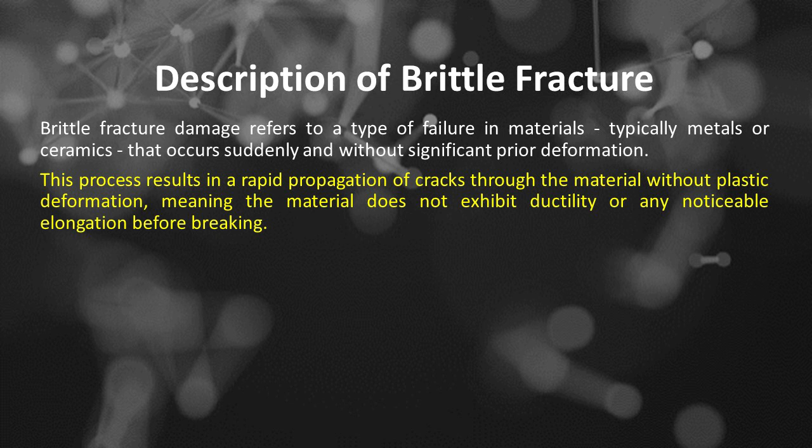Brittle fracture is the sudden rapid fracture under stress, residual or applied, where the material exhibits little or no evidence of ductility or plastic deformation. Brittle fracture damage refers to a type of failure in materials, typically metals or ceramics, that occurs suddenly and without significant prior deformation. This process results in a rapid propagation of cracks through the material without plastic deformation, meaning the material does not exhibit ductility or any noticeable elongation before breaking.

Characteristics of brittle fracture include the following. Number 1 is rapid or sudden failure. Brittle fractures often occur without warning, leading to catastrophic failure, as the material can withstand loads up to a critical point and then fail almost instantaneously.

Number 2 is crack propagation. The fracture typically progresses along specific planes called cleavage planes, often following the material's microstructural features. Crack propagation is generally fast, leading to sharp, clean fracture surfaces.

Number 3 is appearance of fracture surface. The surfaces created by brittle fractures usually show a glossy or granular texture, with no evidence of deformation such as stretching or bending. The presence of cleavage facets, where the fracture has split along crystallographic planes, is common, particularly in metallic materials.

Number 4 is factors influencing brittle fracture. Several factors can contribute to brittle fracture, including material composition, temperature, strain rate, and stress concentration from notches or other geometric discontinuities. Lower temperatures and higher strain rates generally promote brittle behavior in materials that may otherwise exhibit ductility.

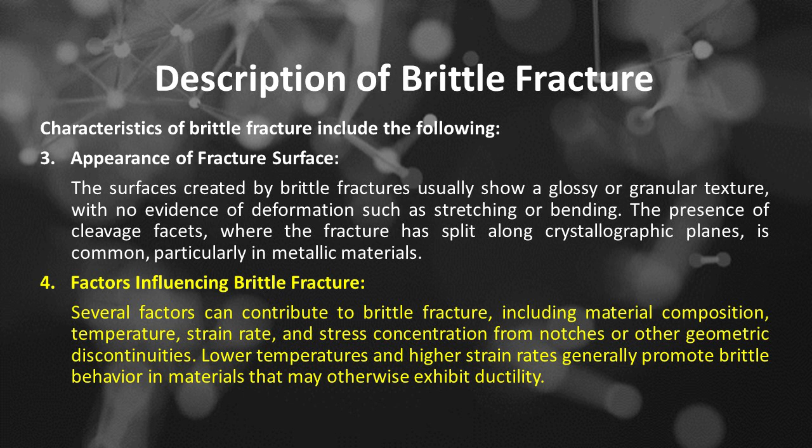Number 5 is applications and implications. Understanding brittle fracture is essential in various industrial applications, as it can lead to premature failure in structural components, pipelines, and machinery. Engineers often design to minimize the risk of brittle fracture by using materials with good toughness, avoiding stress concentrators, and ensuring appropriate operating conditions.

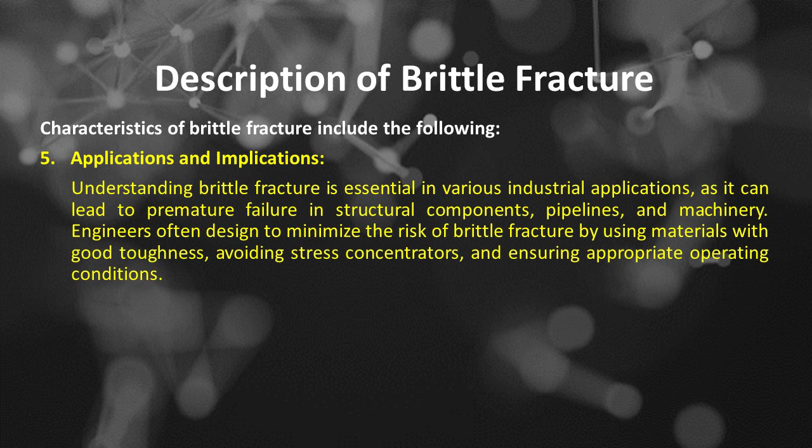Number 6 is fracture toughness and mechanics. The first is fracture toughness, or low toughness. The ability of a material to resist brittle fracture is quantified by its fracture toughness, which is a critical property in the selection of materials for applications where failure could have severe consequences. Materials that are susceptible to brittle fracture usually have low toughness, which means they cannot absorb much energy before failing.

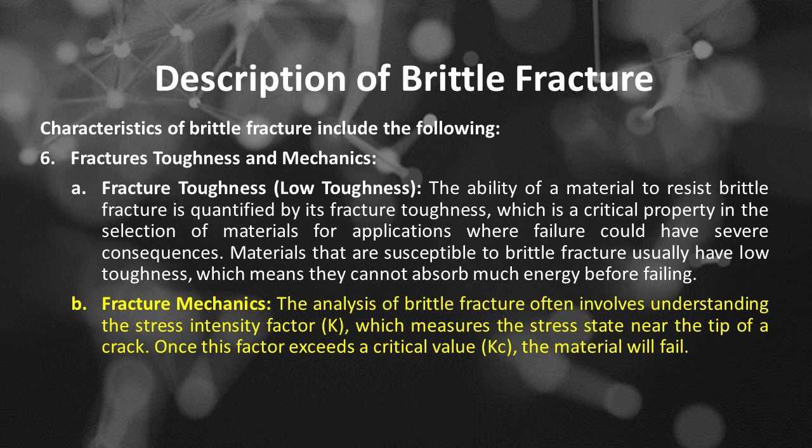The second is fracture mechanics. The analysis of brittle fracture often involves understanding the stress intensity factor, or K, which measures the stress state near the tip of a crack. Once this factor exceeds a critical value, or Kc, the material will fail.

In conclusion, brittle fracture damage represents a significant failure mode that engineers and materials scientists must consider, particularly in the design and maintenance of structures that require high reliability and safety. Brittle fracture damage is a critical failure mode in materials that can lead to unexpected and catastrophic structural failures, necessitating careful consideration in engineering and material selection.

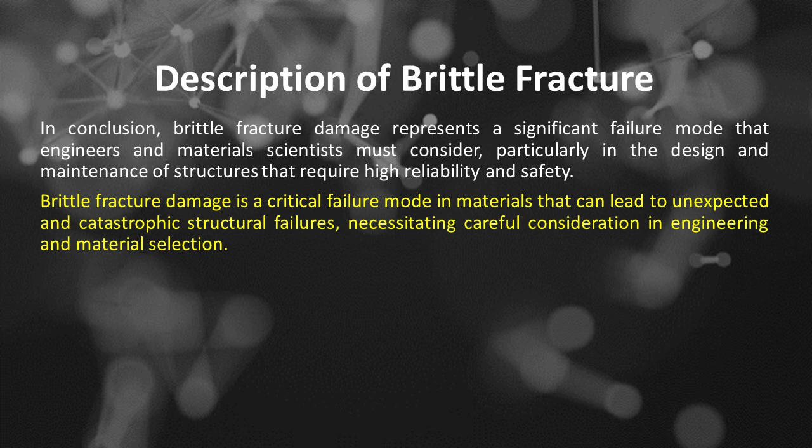Affected materials of brittle fracture damage based on API 571. Carbon steels and low-alloy steels are of prime concern, particularly older steels. 400 series SS are also susceptible. Brittle fracture is a failure mechanism that occurs in materials when they are subjected to stress and do not exhibit significant plastic deformation before breaking.

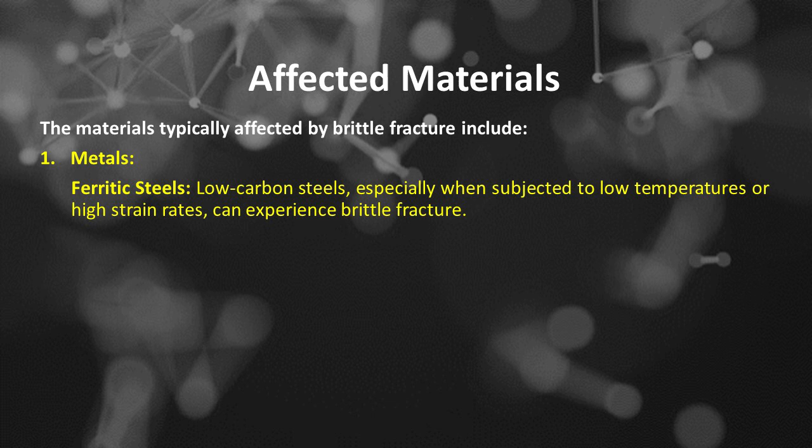The materials typically affected by brittle fracture include: Number 1 is metals, such as the following. Ferritic steels, low-carbon steels, especially when subjected to low temperatures or high strain rates, can experience brittle fracture. And high-strength steels, these materials can be susceptible to brittle fracture, particularly in welds or heat-affected zones. And then cast irons, particularly gray cast iron and white cast iron, can experience brittle fracture, especially under stress concentrations.

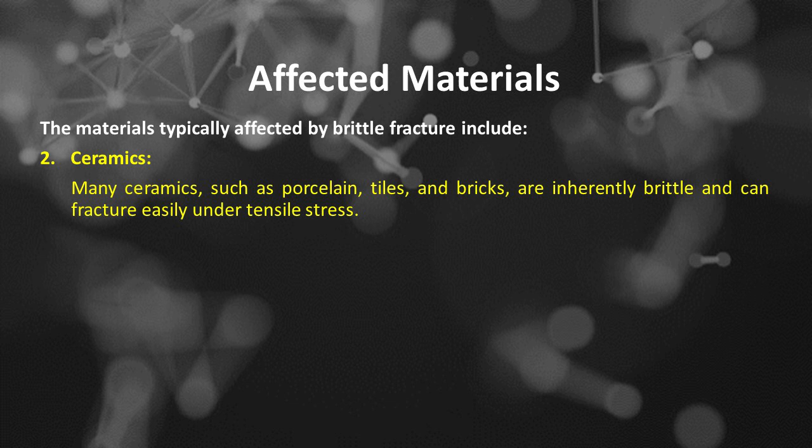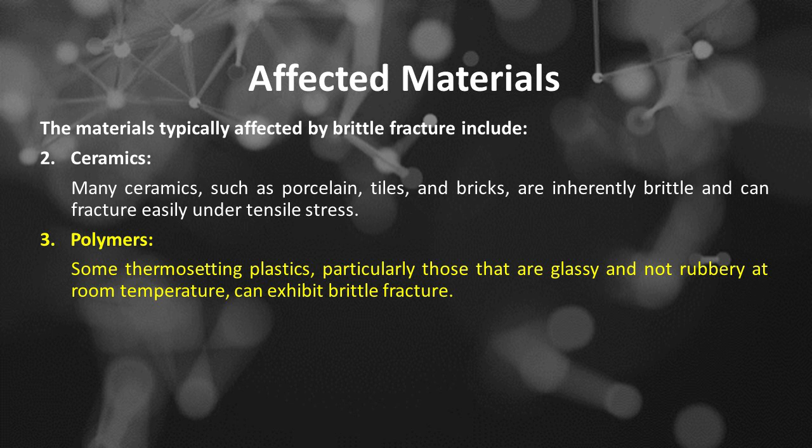Number 2 is ceramics. Many ceramics, such as porcelain, tiles, and bricks, are inherently brittle and can fracture easily under tensile stress. Number 3 is polymers. Some thermosetting plastics, particularly those that are glassy and not rubbery at room temperature, can exhibit brittle fracture. Number 4 is composites.

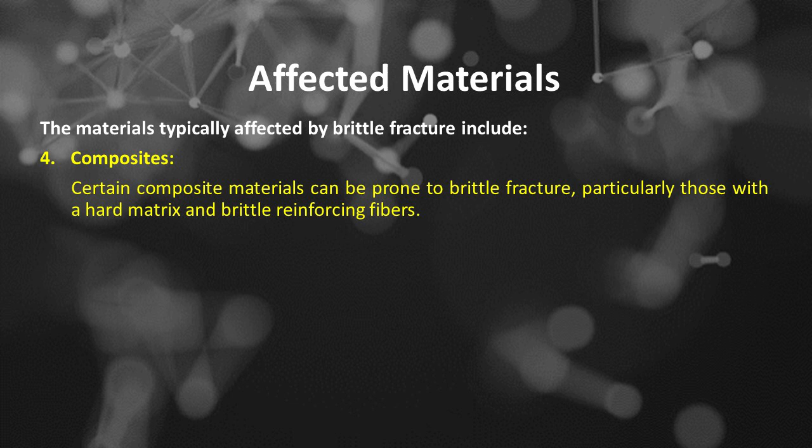Certain composite materials can be prone to brittle fracture, particularly those with a hard matrix and brittle reinforcing fibers. Number 5 is glasses. Glasses are also considered brittle materials and can fracture without noticeable plastic deformation. Factors such as temperature, loading rate, and the presence of stress concentrators, like notches or cracks, can influence the susceptibility of these materials to brittle fracture.

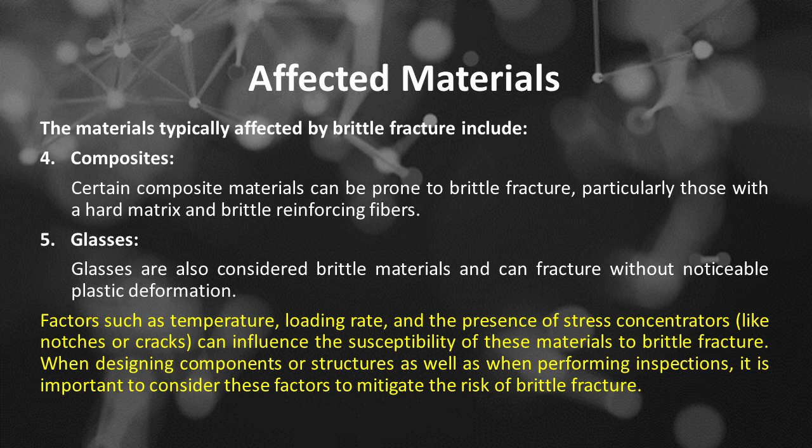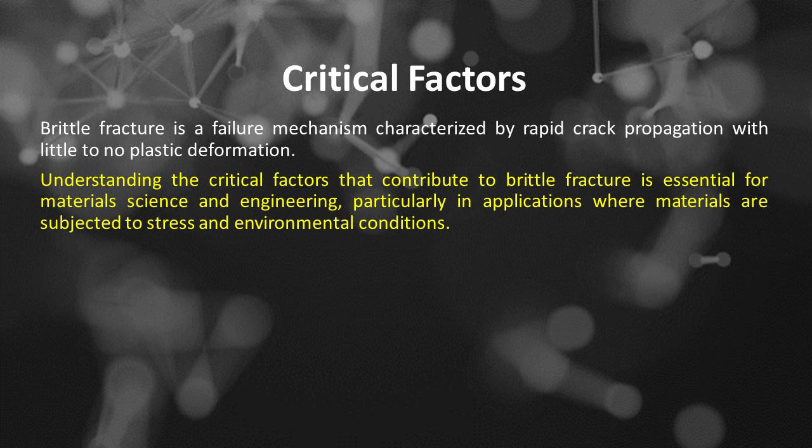When designing components or structures as well as when performing inspections, it is important to consider these factors to mitigate the risk of brittle fracture. Brittle fracture is a failure mechanism characterized by rapid crack propagation with little to no plastic deformation. Understanding the critical factors that contribute to brittle fracture is essential for materials science and engineering, particularly in applications where materials are subjected to stress and environmental conditions.

Critical key factors of brittle fracture include: Number 1 is material properties. The first for material properties to be considered is yield strength and toughness. Brittle materials generally have high yield strengths but low toughness. The material's ability to absorb energy before fracturing is crucial.

The second for material properties to be considered is ductile to brittle transition temperature, or DBTT. Some materials exhibit a transition from ductile to brittle behavior at certain temperatures. This is critical for metals.

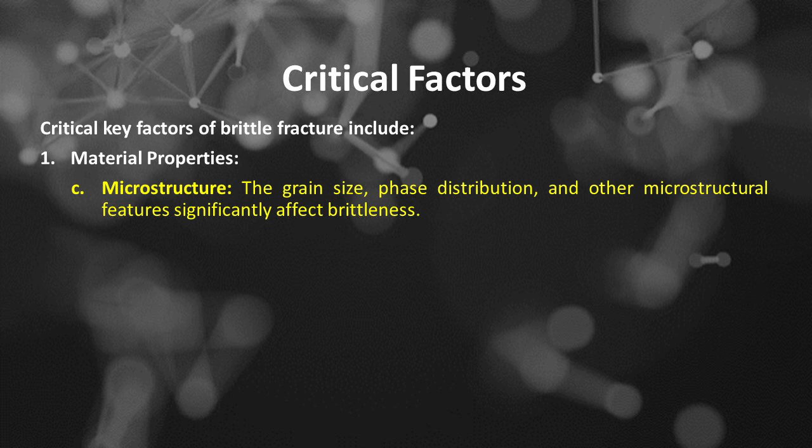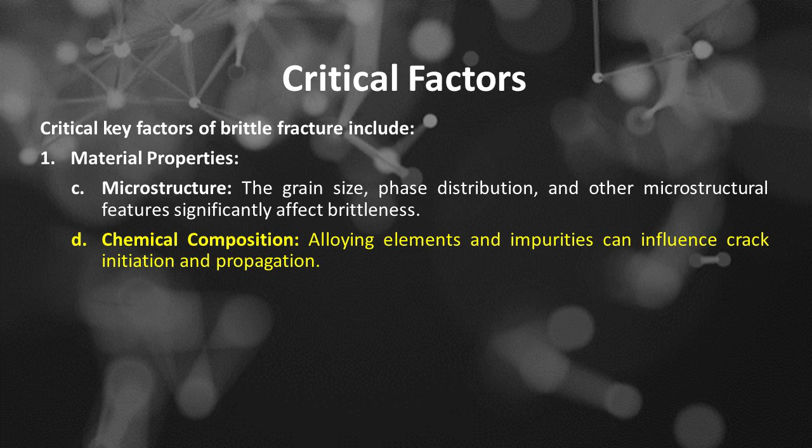The third material property to be considered is microstructure. Grain size, phase distribution, and other microstructural features significantly affect brittleness. The fourth material property to be considered is chemical composition. Alloying elements and impurities can influence crack initiation and propagation.

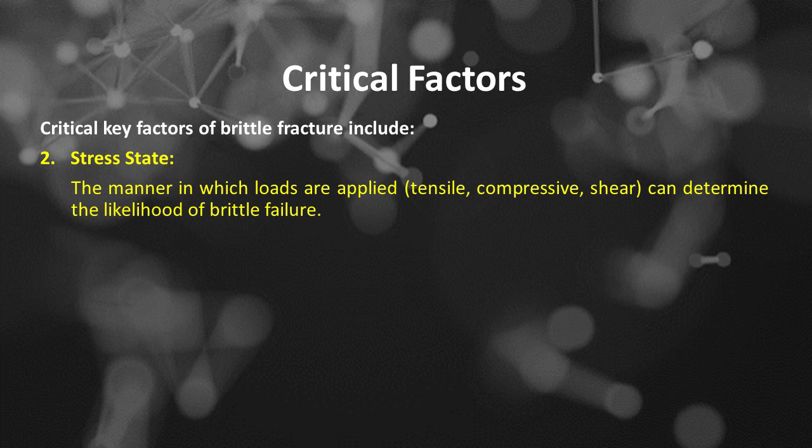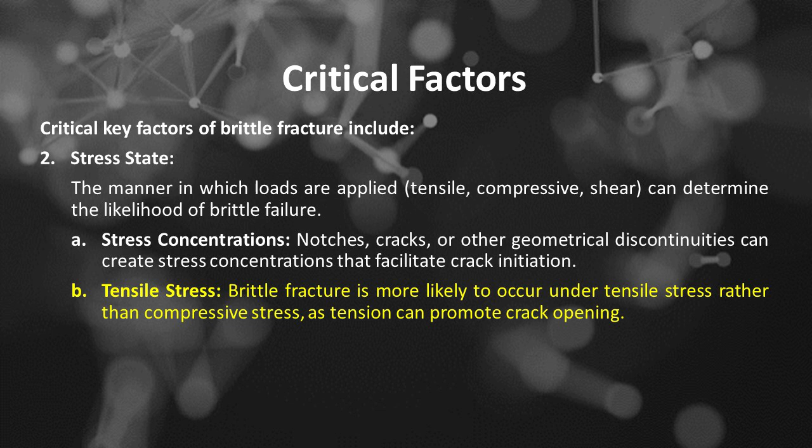Number 2 of the critical key factors of brittle fracture damage mechanisms is stress state. The manner in which loads are applied, tensile, compressive, shear, can determine the likelihood of brittle failure. The first aspect of stress state is stress concentrations. Notches, cracks, or other geometrical discontinuities can create stress concentrations that facilitate crack initiation. The second aspect is tensile stress. Brittle fracture is more likely to occur under tensile stress rather than compressive stress, as tension can promote crack opening.

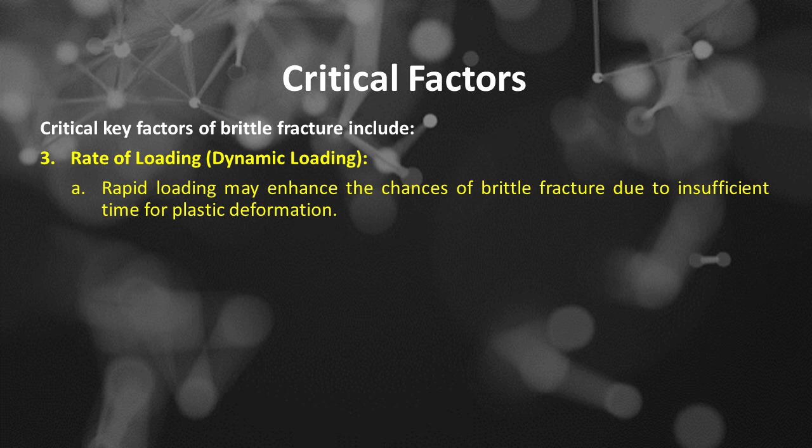Number 3 is rate of loading or dynamic loading. Rapid loading may enhance the chances of brittle fracture due to insufficient time for plastic deformation.

Number 4 is environmental factors, such as the following. The first is temperature and humidity. Low temperatures can promote brittle behavior in certain materials and can increase the likelihood of brittle fracture, while certain environments, like corrosive conditions, can promote crack growth.

The second is corrosive environments. Chemicals can weaken bonds and create stress concentrators, leading to brittle failure, e.g., stress corrosion cracking. The third is hydrogen embrittlement. The presence of hydrogen can severely reduce the ductility of certain metals.

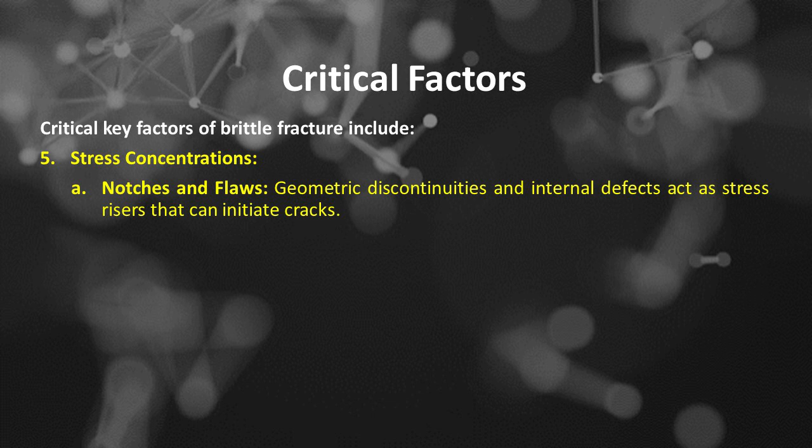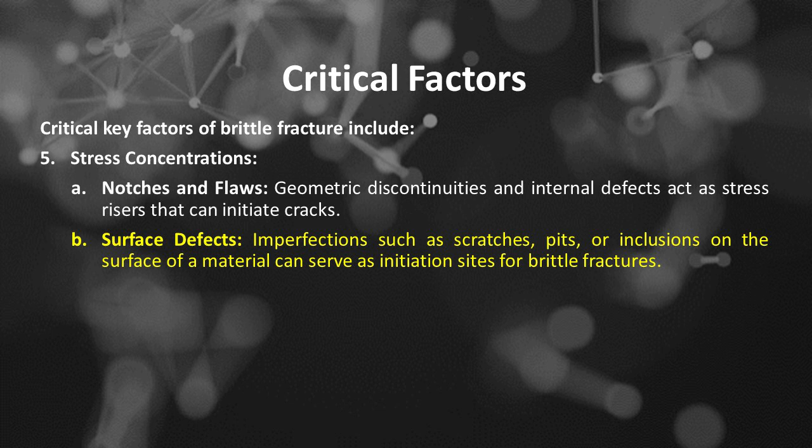Number 5 is stress concentrations, such as the following. The first is notches and flaws. Geometric discontinuities and internal defects act as stress risers that can initiate cracks. The second is surface defects. Imperfections such as scratches, pits, or inclusions on the surface of a material can serve as initiation sites for brittle fractures. Number 6 is microstructural features, such as the following.

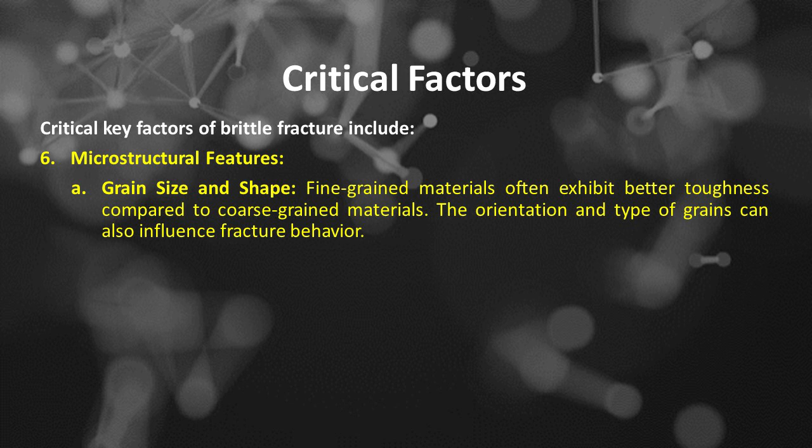The first is grain size and shape. Fine-grained materials often exhibit better toughness compared to coarse-grained materials. The orientation and type of grains can also influence fracture behavior. The second is defects and inclusions. Internal flaws, voids, or inclusions can act as stress concentrators leading to the initiation of fractures.

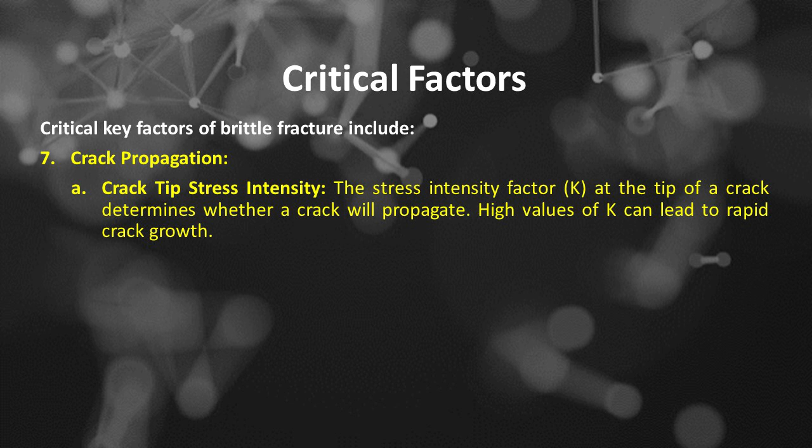Number 7 is crack propagation. The first aspect is crack tip stress intensity. The stress intensity factor, K, at the tip of a crack determines whether a crack will propagate. High values of K can lead to rapid crack growth. The second aspect is fracture toughness. The ability of a material to resist crack propagation is measured by its fracture toughness. Low fracture toughness can lead to sudden brittle failure.

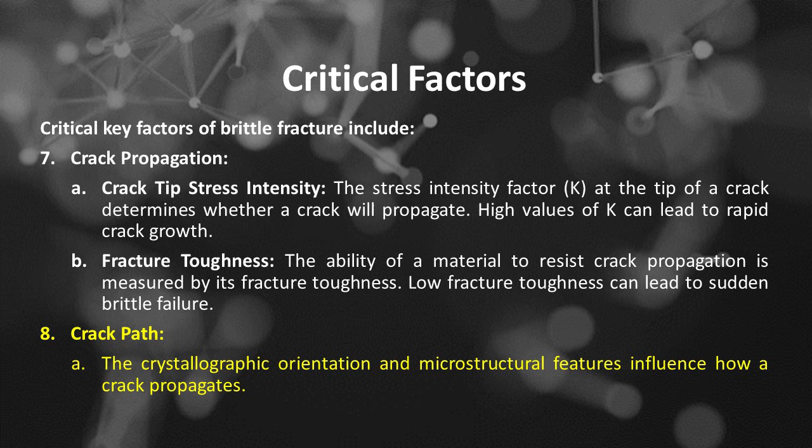Number 8 is crack path. The crystallographic orientation and microstructural features influence how a crack propagates.

Number 9 is geometry and design, such as the following. The first is component design. Poor design that does not account for stress distributions can lead to unanticipated brittle failure. Features such as sharp corners or complex geometries can exacerbate stress concentrations. The second is load path. The way loads are applied can also influence stress concentrations and the likelihood of fracture.

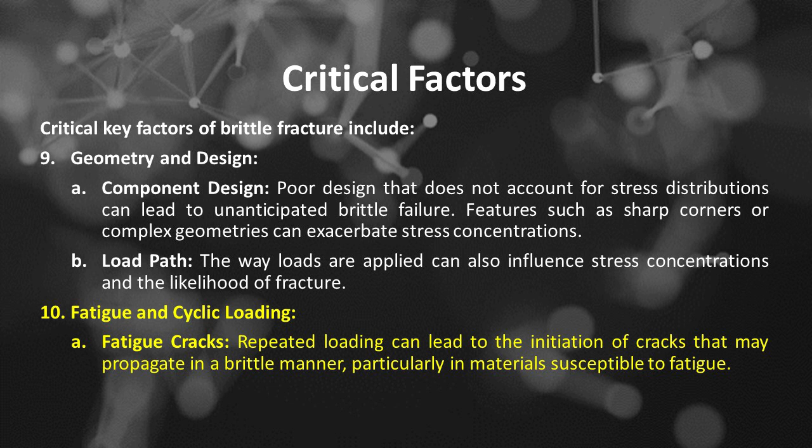Number 10 is fatigue and cyclic loading, such as fatigue cracks. Repeated loading can lead to the initiation of cracks that may propagate in a brittle manner, particularly in materials susceptible to fatigue. Number 11 is residual stresses, such as internal stresses. These may arise from manufacturing processes, welding, or thermal treatment, potentially leading to brittle fracture if they exceed the material's limits. Number 12 is loading history. Previous loading cycles and the history of stress states experienced by the material can influence its susceptibility to brittle fracture.

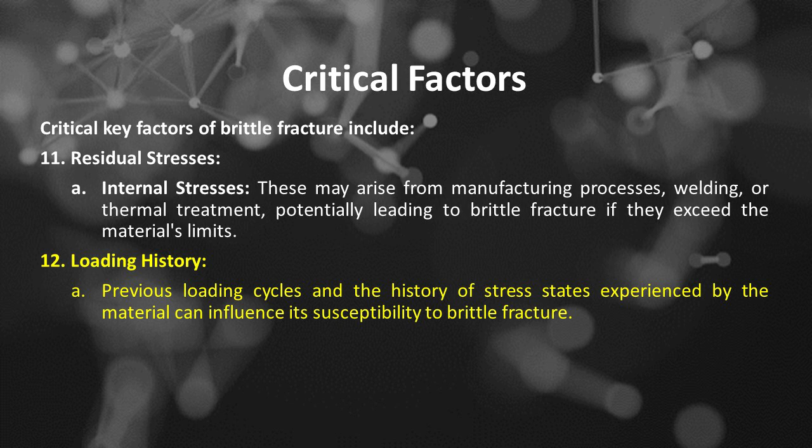Addressing and understanding these factors can be critical in material selection, design, and failure prevention strategies. Ensuring materials are used within their limits and in appropriate environmental conditions can help mitigate the risk of brittle fracture.

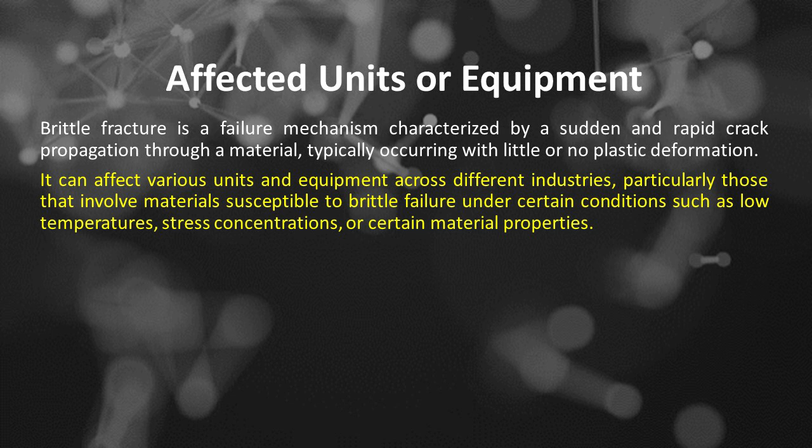Affected units or equipment. Brittle fracture is a failure mechanism characterized by a sudden and rapid crack propagation through a material, typically occurring with little or no plastic deformation. It can affect various units and equipment across different industries, particularly those that involve materials susceptible to brittle failure under certain conditions such as low temperatures, stress concentrations, or certain material properties. Here are some commonly affected units or equipment.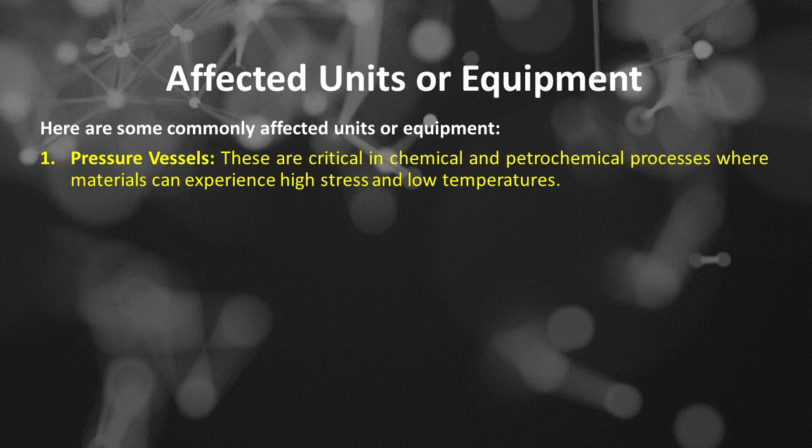Number 1 is pressure vessels. These are critical in chemical and petrochemical processes where materials can experience high stress and low temperatures. Number 2 is pipe systems. Piping made of brittle materials or subjected to low temperatures can suffer from brittle fracture, especially at welded joints or where there are stress concentrators.

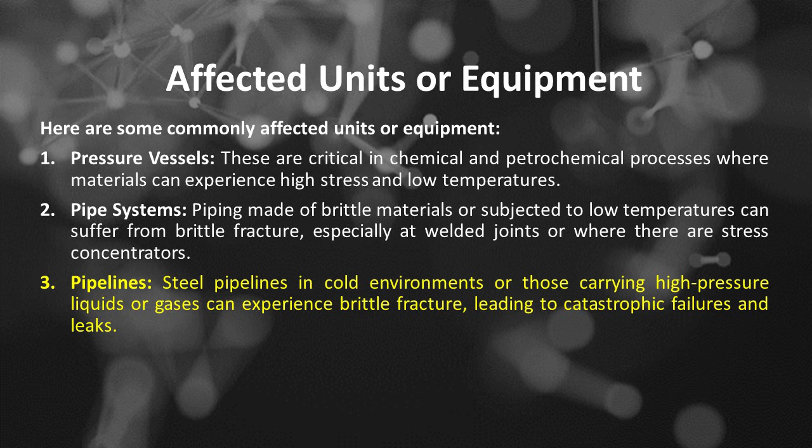Number 3 is pipelines. Steel pipelines in cold environments or those carrying high-pressure liquids or gases can experience brittle fracture, leading to catastrophic failures and leaks. Number 4 is storage tanks. Tanks used for storing liquefied gases, particularly at cryogenic temperatures, can experience brittle fracture if the materials are not adequately selected. Number 5 is heat exchangers. Components made from brittle materials may fail during thermal cycling or due to stress concentrations from operational factors.

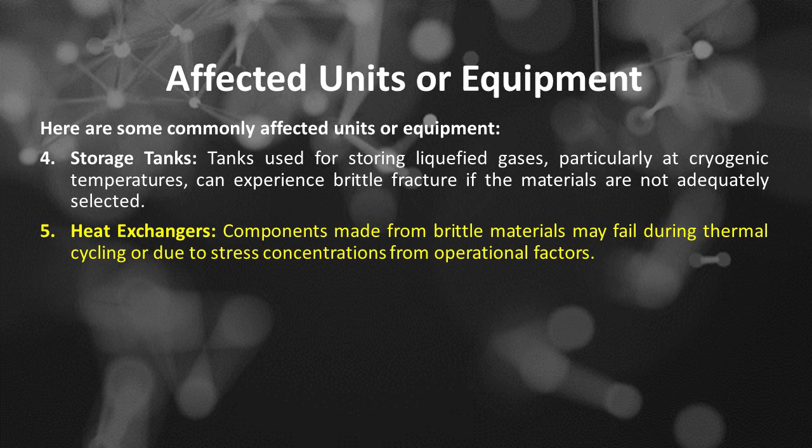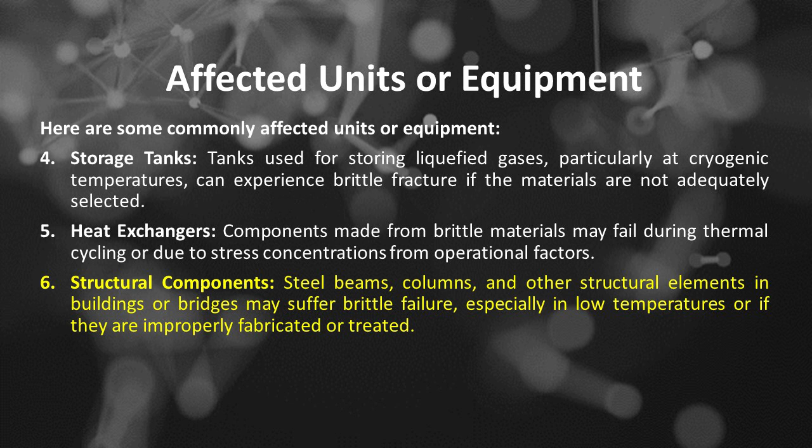Number 6 is structural components. Steel beams, columns, and other structural elements in buildings or bridges may suffer brittle failure, especially in low temperatures or if they are improperly fabricated or treated. Number 7 is rotating equipment.

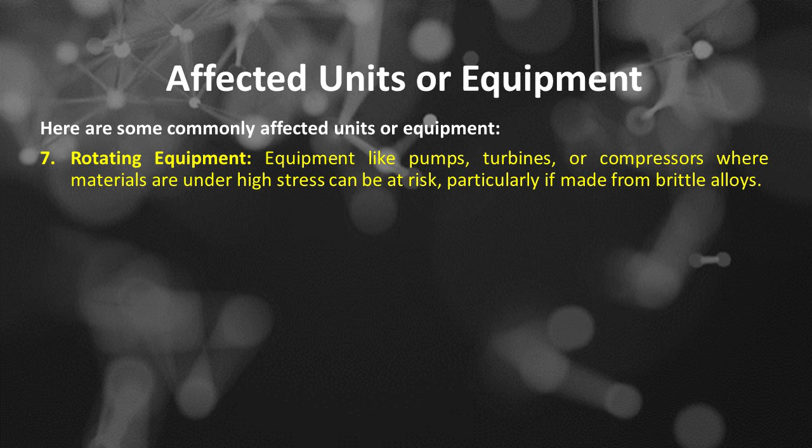Equipment like pumps, turbines, or compressors where materials are under high stress can be at risk, particularly if made from brittle alloys. Number 8 is transportation equipment.

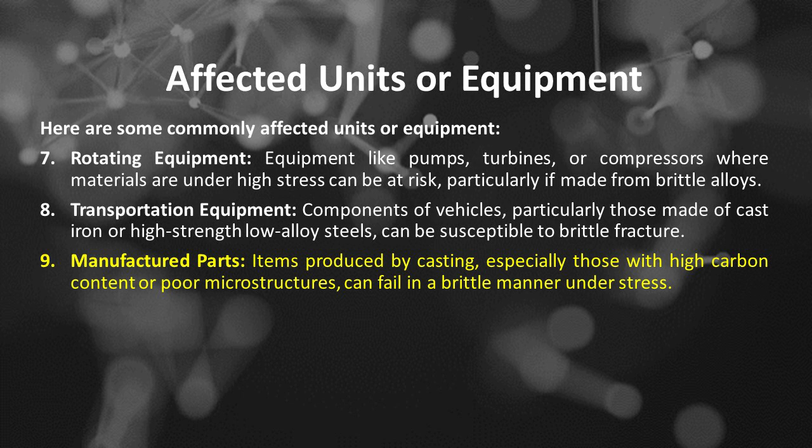Items produced by casting, especially those with high carbon content or poor microstructures, can fail in a brittle manner under stress. Number 10 is forgings and machined components. Parts that have complex geometries or sharp corners may be more likely to exhibit brittle fracture.

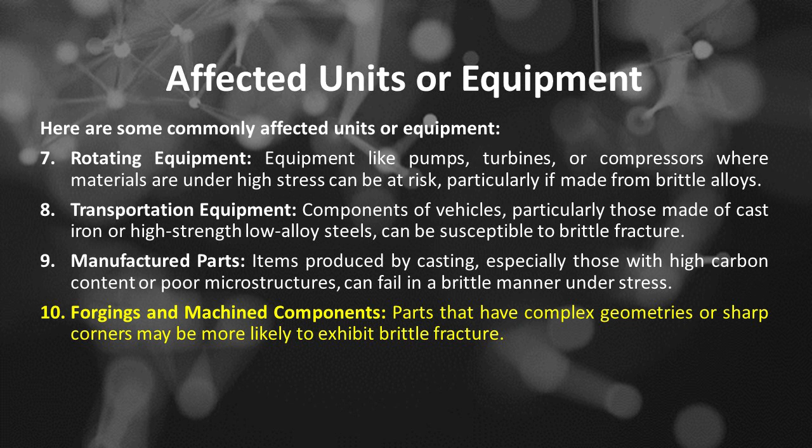Number 11 is wind turbine blades. Composite materials used in wind turbine blades can also be susceptible to brittle fracture under certain loading conditions.

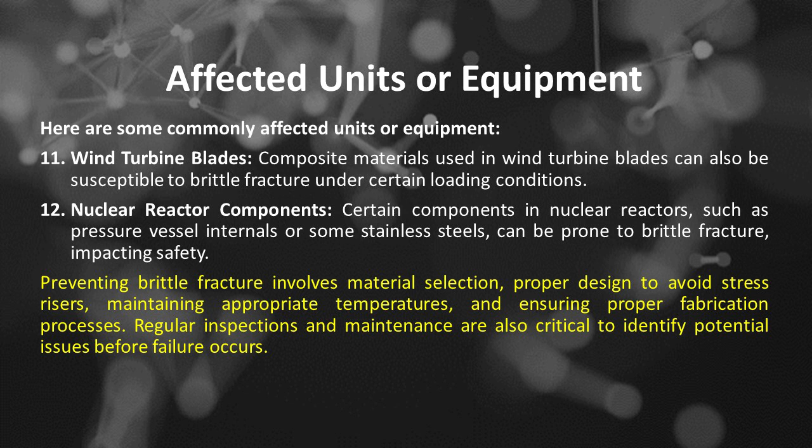Number 12 is nuclear reactor components. Certain components in nuclear reactors, such as pressure vessel internals or some stainless steels, can be prone to brittle fracture, impacting safety. Preventing brittle fracture involves material selection, proper design to avoid stress risers, maintaining appropriate temperatures, and ensuring proper fabrication processes. Regular inspections and maintenance are also critical to identify potential issues before failure occurs.

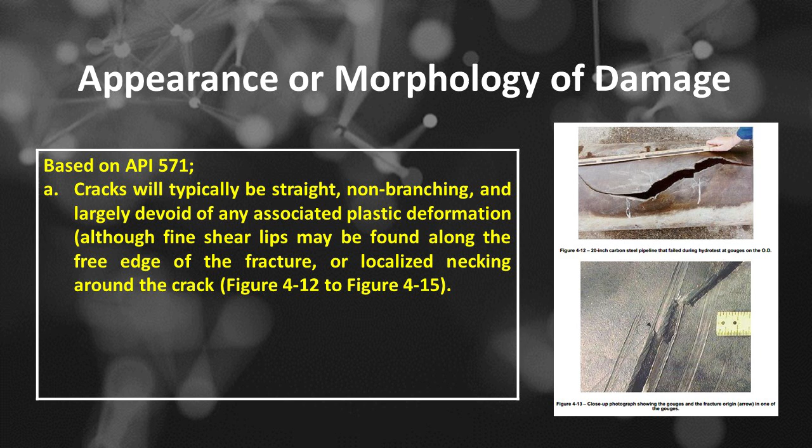Appearance or morphology of brittle fracture damage mechanisms, based on API 571. The first is cracks will typically be straight, non-branching, and largely devoid of any associated plastic deformation, although fine shear lips may be found along the free edge of the fracture, or localized necking around the crack. See Figure 4:12 to Figure 4:15.

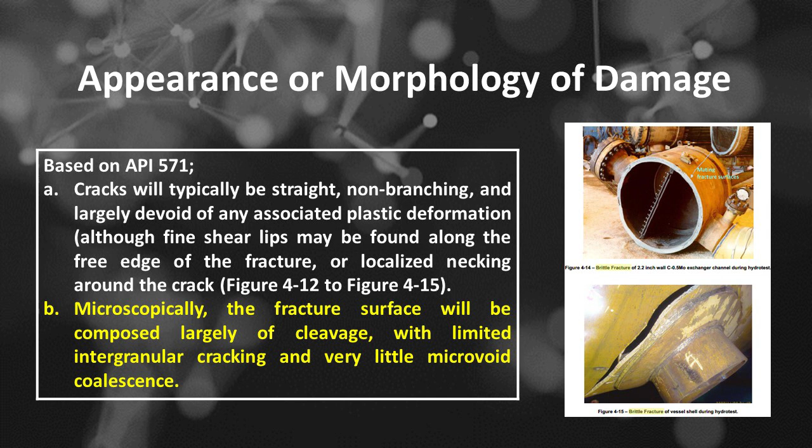The second is microscopically, the fracture surface will be composed largely of cleavage, with limited intergranular cracking and very little microvoid coalescence. Brittle fracture is a type of fracture that occurs in materials with little to no plastic deformation before failure. The appearance and morphology of brittle fracture can be characterized by several features.

Number 1 is smooth and flat fracture surface. Brittle fractures often exhibit smooth, flat surfaces compared to the rough and irregular surfaces associated with ductile fractures. This smoothness is due to the propagation of the crack without significant plastic deformation.

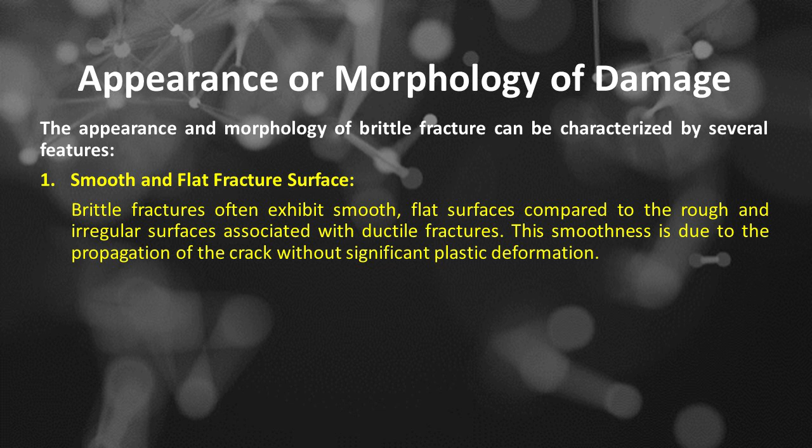Number 2 is cleavage or transgranular fracture. In many metallic materials, brittle fractures can occur through the crystal structure along specific crystallographic planes, known as cleavage. This results in a shiny appearance of the fracture surface. In some materials, such as certain ceramics, fractures can propagate transgranularly through the grains.

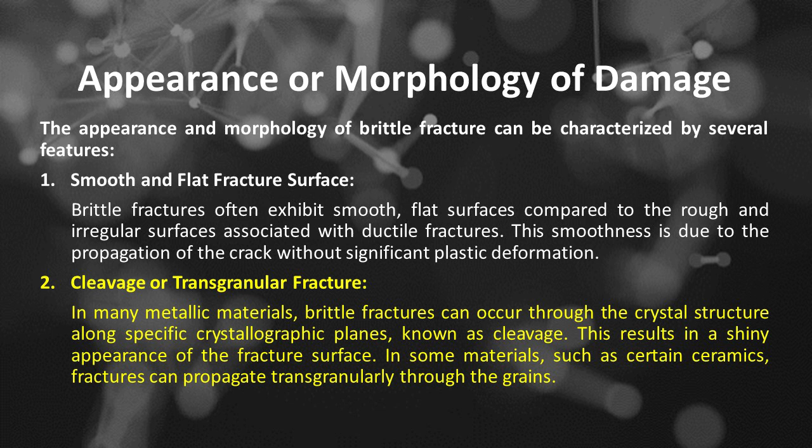Number 3 is dimpled appearance. Although generally less prominent in brittle fractures than in ductile fractures, some brittle fractures may display a fine pattern of dimples if there is some localized deformation, often referred to as microvoid coalescence.

Number 4 is radial and conical features. The fracture surfaces can sometimes exhibit radial patterns or conical features, especially in brittle materials subjected to tensile stress. This can suggest the direction of crack propagation.

Number 5 is fracture origin points. Brittle fractures often start at defect sites, such as voids, inclusions, or stress concentrators. These initiation points may be identifiable on the fracture surface.

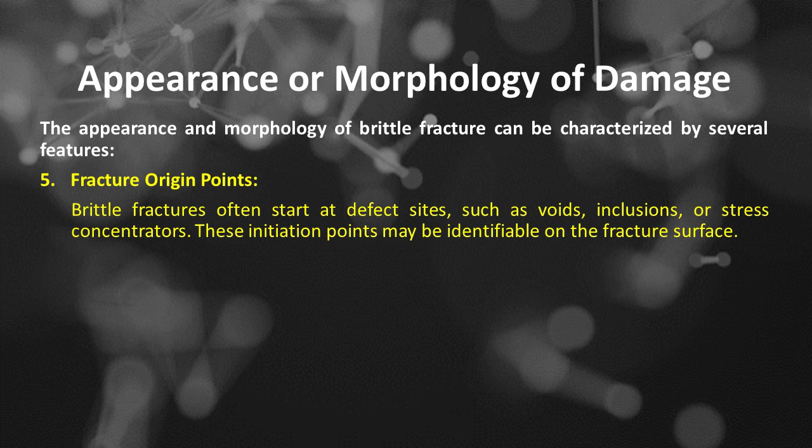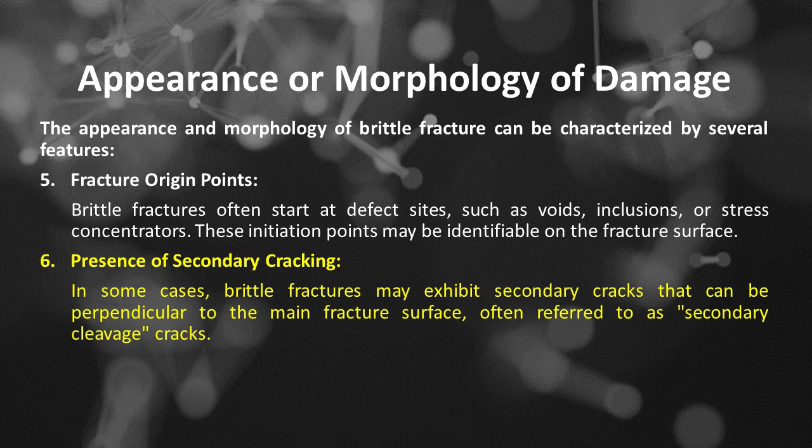Number 6 is presence of secondary cracking. In some cases, brittle fractures may exhibit secondary cracks that can be perpendicular to the main fracture surface, often referred to as secondary cleavage cracks.

Number 7 is lack of plastic deformation. In brittle fracture, there is little to no visible deformation before the fracture occurs. The lack of necking, which is typical in ductile fracture, is a key characteristic.

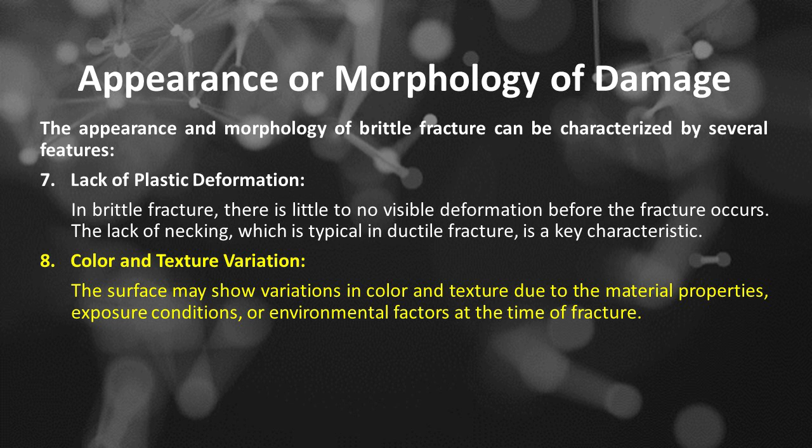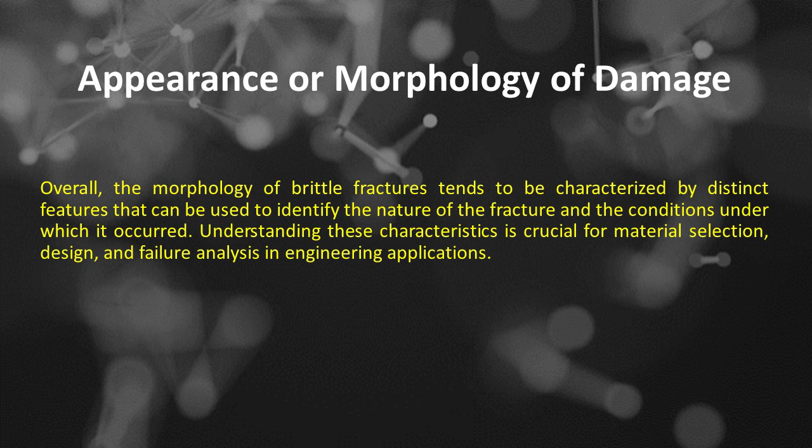Number 8 is color and texture variation. The surface may show variations in color and texture due to the material properties, exposure conditions, or environmental factors at the time of fracture. Overall, the morphology of brittle fractures tends to be characterized by distinct features that can be used to identify the nature of the fracture and the conditions under which it occurred. Understanding these characteristics is crucial for material selection, design, and failure analysis in engineering applications.

Prevention and/or mitigation. Prevention and mitigation of brittle fracture damage involve a combination of design, material selection, fabrication, and testing measures. Here are some key prevention and mitigation strategies.

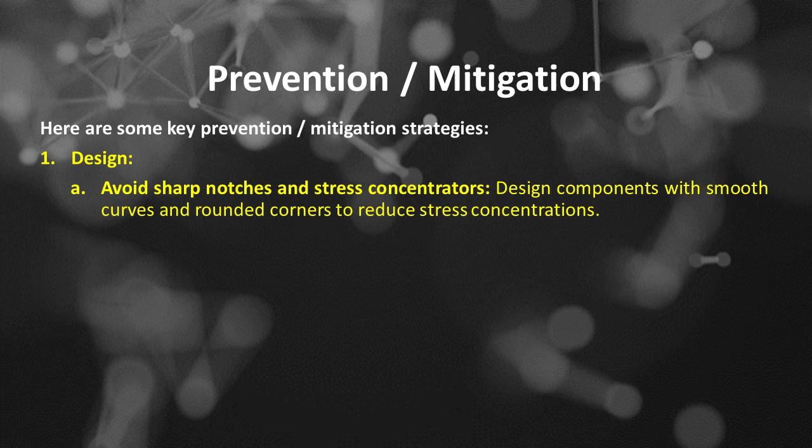Number 1 is design. The first of prevention and mitigation strategies in terms of design is to avoid sharp notches and stress concentrators. Design components with smooth curves and rounded corners to reduce stress concentrations.

The second of prevention and mitigation strategies in terms of design is to use fail-safe design. Design components to fail in a ductile manner, allowing for some degree of deformation before failure.

The third of prevention and mitigation strategies in terms of design is to consider fatigue loading. Design components to withstand repeated loading and unloading cycles, which can lead to fatigue failure.

Number 2 is to consider material selection, such as the following. Choose materials with high toughness, select materials with high fracture toughness, or KIC, and high strain energy release rate, or GIC, to resist brittle fracture.

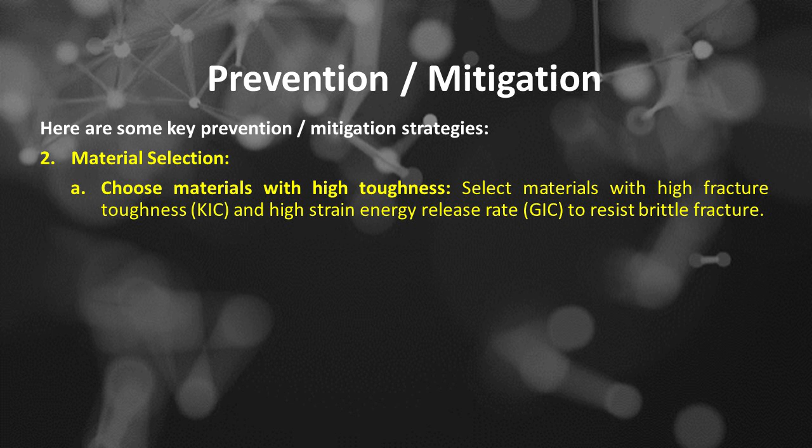Use materials with good ductility. Select materials that can absorb energy and deform plastically before failing. Then consider material processing. Select materials that have been processed to minimize defects and inclusions, which can act as crack initiators.

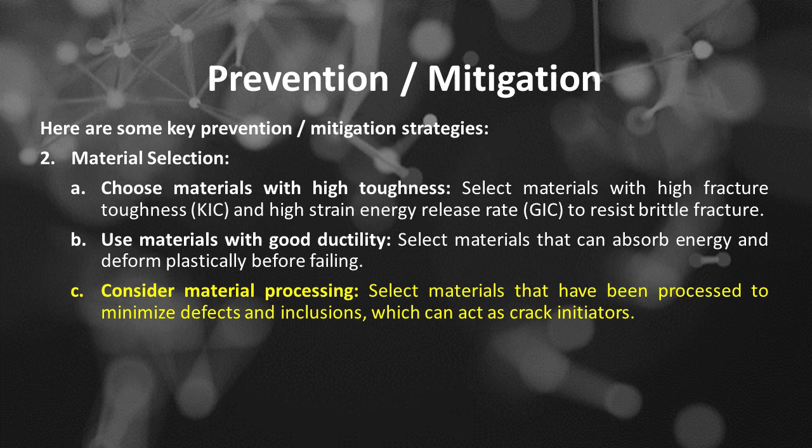Number 3 is fabrication, such as the following. The first to be considered in terms of fabrications is welding and joining. Use proper welding and joining techniques to minimize residual stresses and ensure sound joints.

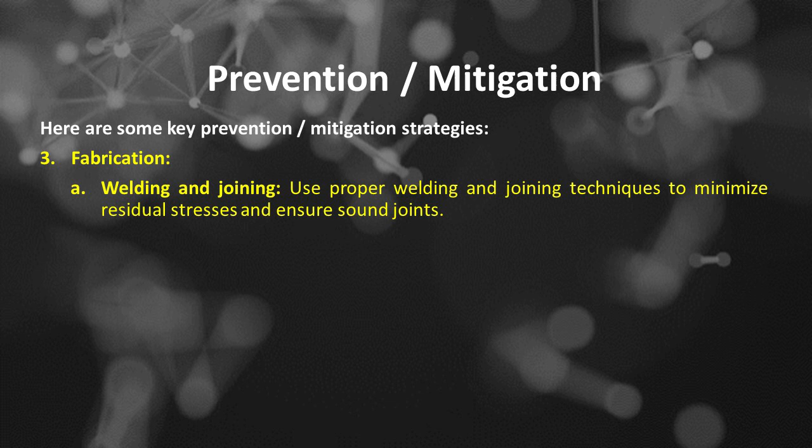The second of key prevention and mitigation strategies in terms of fabrication to be considered is heat treatment. Apply heat treatment to relieve residual stresses and improve material properties.

The third of key prevention and mitigation strategies in terms of fabrication to be considered is surface finish. Ensure a smooth surface finish to reduce stress concentrations.

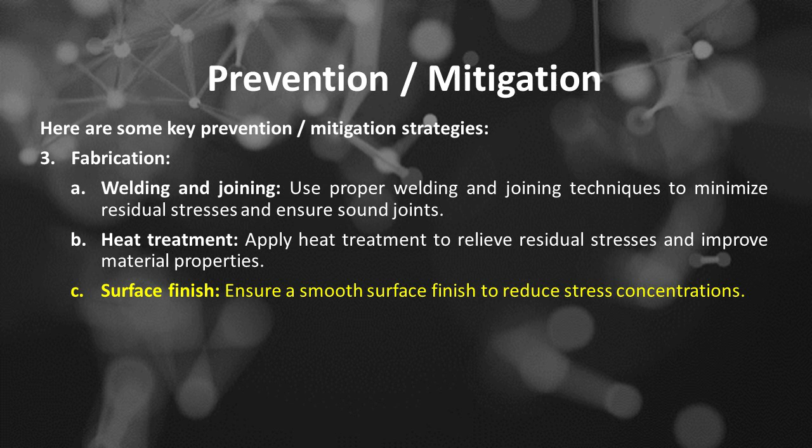Number 4 is operational measures. The first of key prevention and mitigation strategies to be considered in terms of operational measures is to avoid low temperatures. Operate equipment within a temperature range that minimizes the risk of brittle fracture.

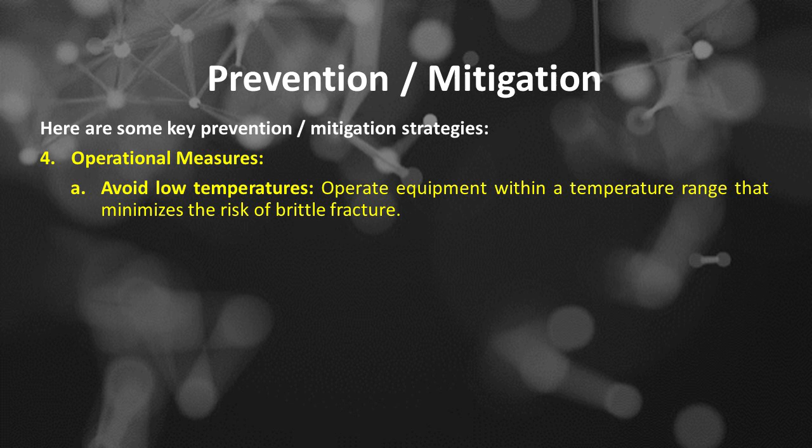The second of key prevention and mitigation strategies to be considered in terms of operational measures is to control pressure and loading. Control pressure and loading conditions to avoid excessive stresses.

The third of key prevention and mitigation strategies to be considered in terms of operational measures is to monitor and control corrosion. Monitor and control corrosion to prevent degradation of material properties.

Number 5 is other measures. The first of key prevention and mitigation strategies to be considered in terms of other measures is to use fracture mechanics analysis. Use fracture mechanics analysis to predict the likelihood of brittle fracture and identify potential failure modes.

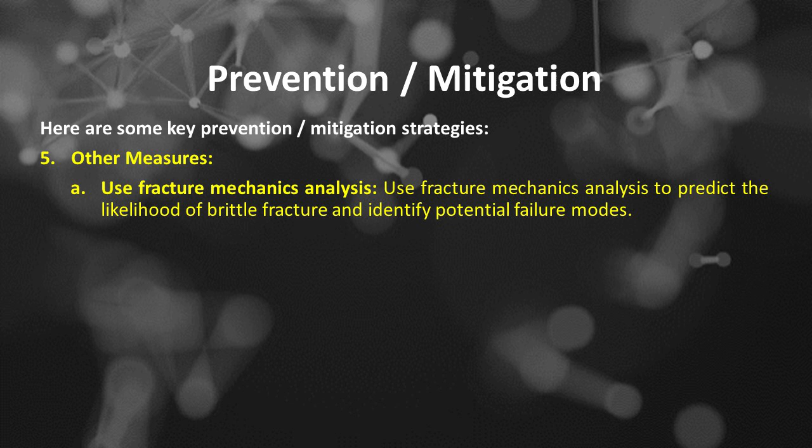The second of key prevention and mitigation strategies to be considered in terms of other measures is to implement a fracture control plan. Develop and implement a fracture control plan to ensure that components are designed, fabricated, and operated to minimize the risk of brittle fracture.

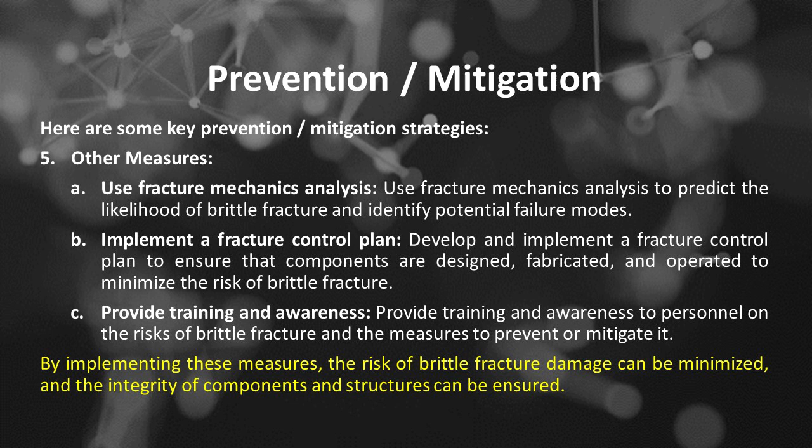The third of key prevention and mitigation strategies to be considered in terms of other measures is to provide training and awareness. Provide training and awareness to personnel on the risks of brittle fracture and the measures to prevent or mitigate it. By implementing these measures, the risk of brittle fracture damage can be minimized, and the integrity of components and structures can be ensured.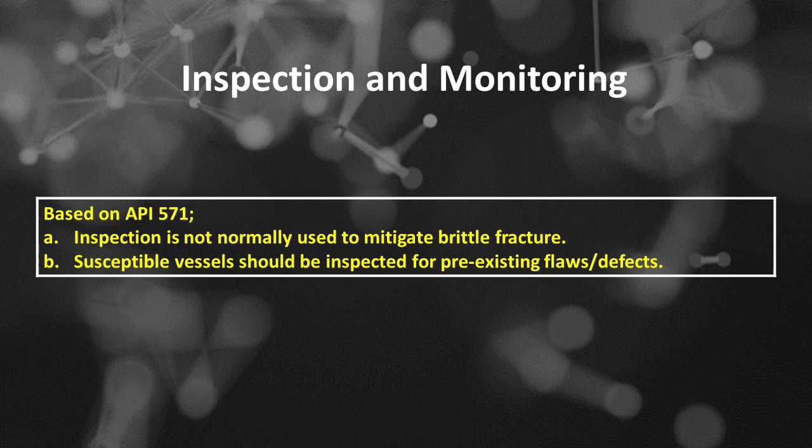Inspection and monitoring for brittle fracture damage mechanisms based on API 571. The first is inspection is not normally used to mitigate brittle fracture, and the second is susceptible vessels should be inspected for pre-existing flaws and defects. Several inspection and monitoring methods can be employed to identify signs of brittle fracture damage.

Number 1 is visual inspection, surface examination. Visual inspections can reveal cracks, surface irregularities, or anomalies on the material surface. This can often be done with the naked eye or with the aid of magnifying tools.

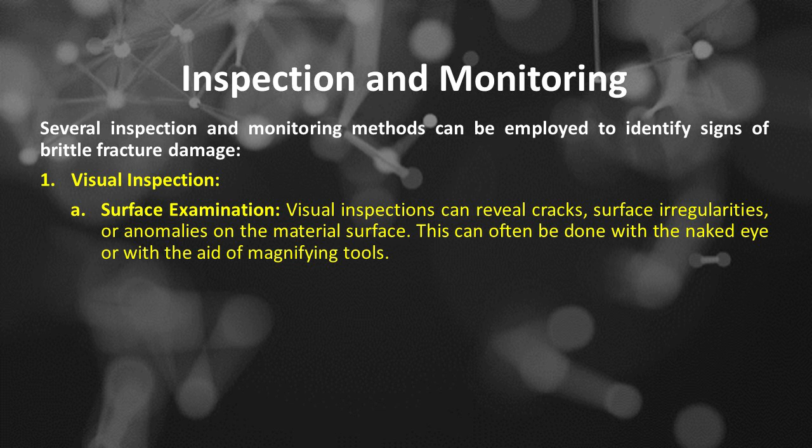Number 2 is non-destructive testing, or NDT. NDT could be divided into 5 categories as the following. The first is ultrasonic testing, or UT. Ultrasonic waves are used to detect internal flaws, cracks, and discontinuities. It is effective for detecting subsurface and near-surface defects.

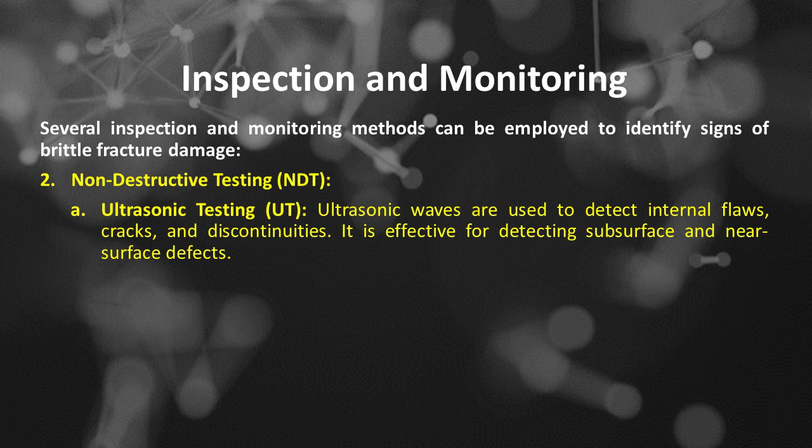The second NDT method is magnetic particle testing, or MT. This method is used for ferromagnetic materials to detect surface and near-surface flaws. A magnetic field is applied, and fine magnetic particles are used to reveal cracks.

The third NDT method is dye penetrant testing, or PT. A liquid dye is applied to the surface of non-porous materials, and after a certain period, excess dye is removed. A developer is then applied, revealing any cracks by the dye that penetrates them.

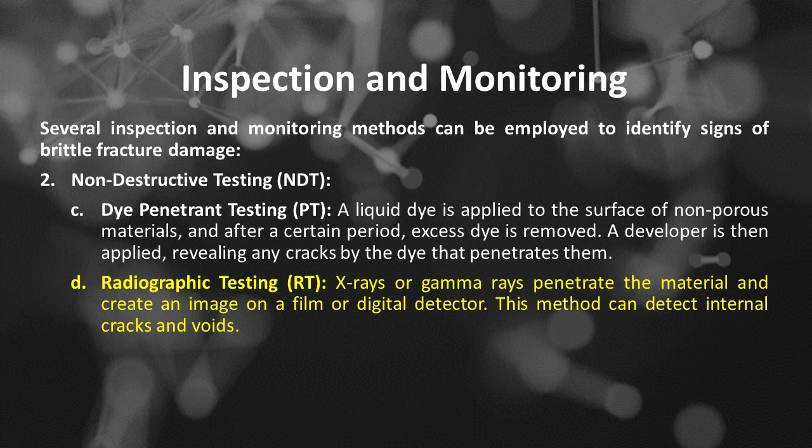The fourth NDT method is radiographic testing, or RT. X-rays or gamma rays penetrate the material and create an image on a film or digital detector. This method can detect internal cracks and voids.

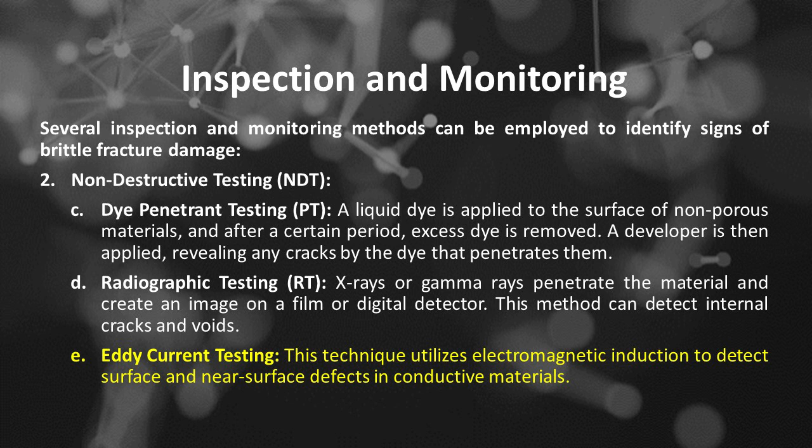The fifth NDT method is eddy current testing. This technique utilizes electromagnetic induction to detect surface and near-surface defects in conductive materials.

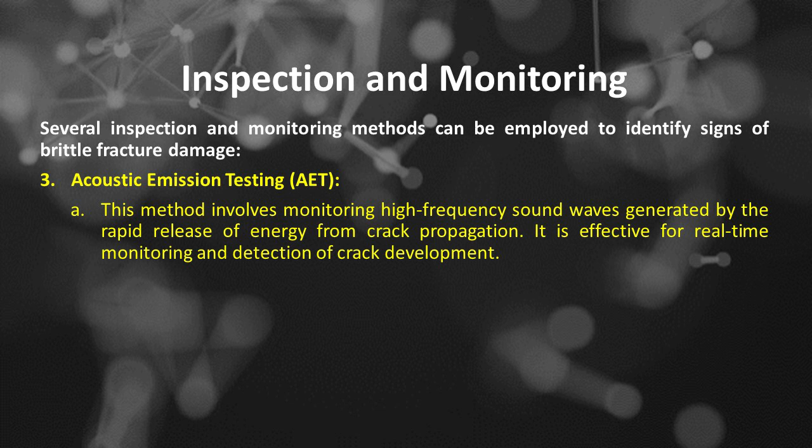Number 3 is acoustic emission testing, or AET. This method involves monitoring high-frequency sound waves generated by the rapid release of energy from crack propagation. It is effective for real-time monitoring and detection of crack development.

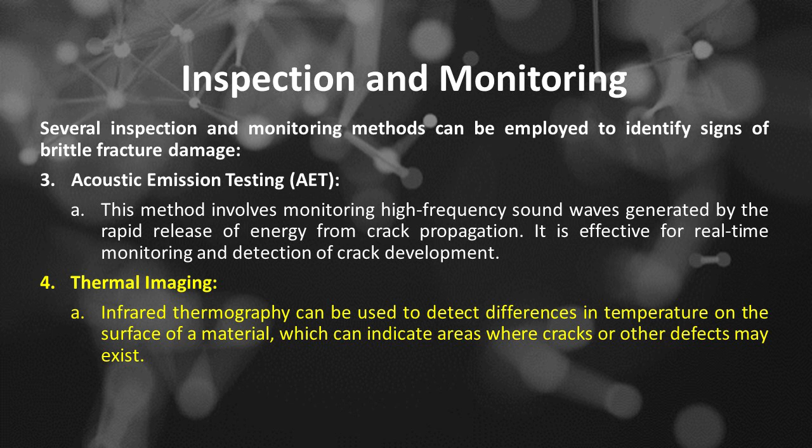Number 4 is thermal imaging. Infrared thermography can be used to detect differences in temperature on the surface of a material, which can indicate areas where cracks or other defects may exist.

Number 5 is strain gauges. Monitoring strain in materials can provide insights into the stress levels that may lead to brittle fracture. A sudden change in strain patterns could indicate imminent fracture risks.

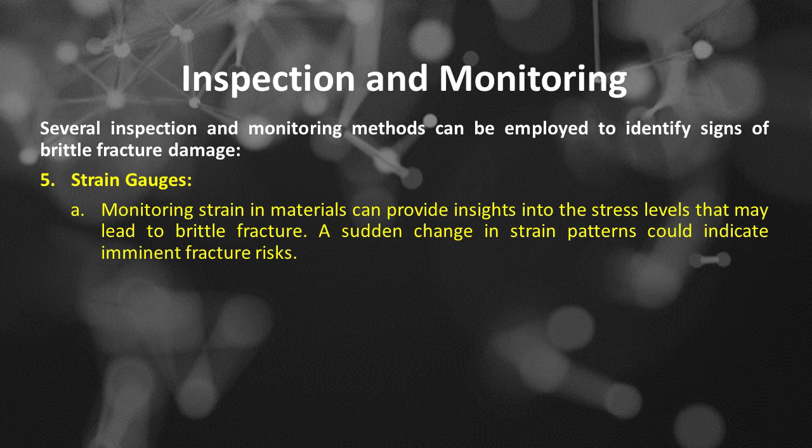Number 7 is fractography. In the event of a failure, examining the fracture surface using techniques like scanning electron microscopy, SEM, can provide valuable information about the nature and causes of brittle fracture.

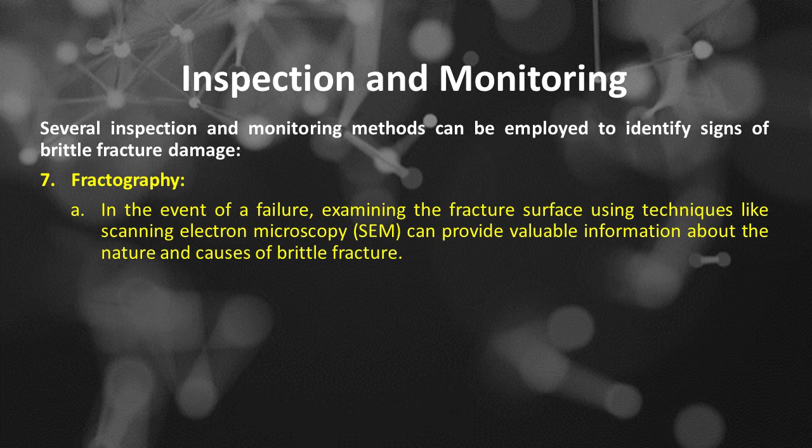Number 8 is critical thickness measurement. For some materials, measuring the thickness and comparing it to established critical thickness criteria can reveal susceptibility to brittle fracture.

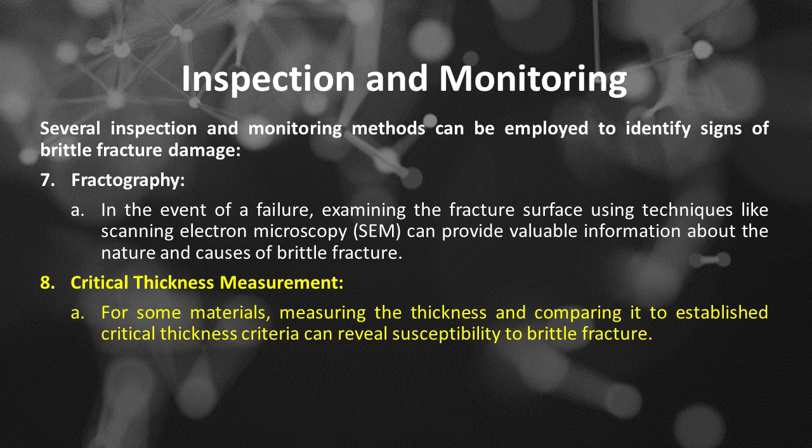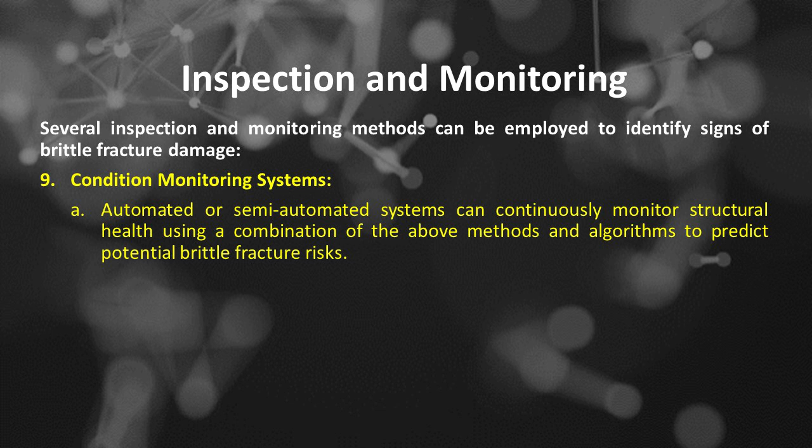Number 9 is condition monitoring systems. Automated or semi-automated systems can continuously monitor structural health using a combination of the above methods and algorithms to predict potential brittle fracture risks. Combining several of these methods is often the most effective way to detect brittle fracture damage. Regular inspections, advanced NDT techniques, and continuous monitoring can help ensure that materials remain safe and functional throughout their life cycle.

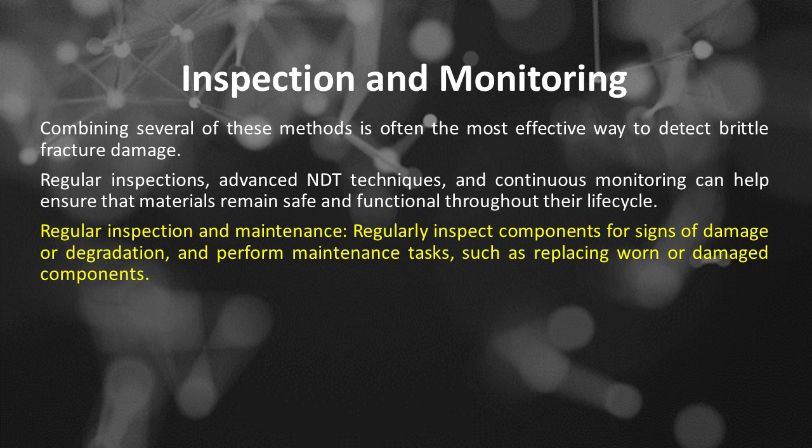Regular inspection and maintenance. Regularly inspect components for signs of damage or degradation, and perform maintenance tasks, such as replacing worn or damaged components.